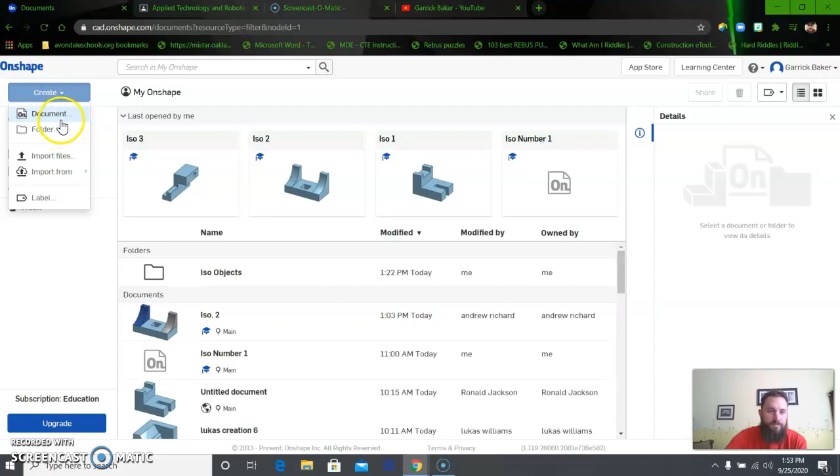I'll go to my Onshape, create document, and this is ISO 4.

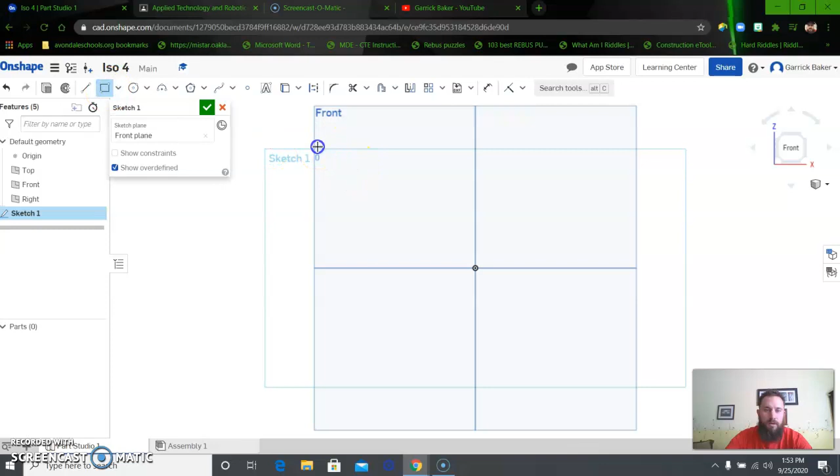I'm going to create a sketch on the front face here again. I'm going to do a rectangle, corner rectangle, and it's 4.5 wide. The height of it was 2.5.

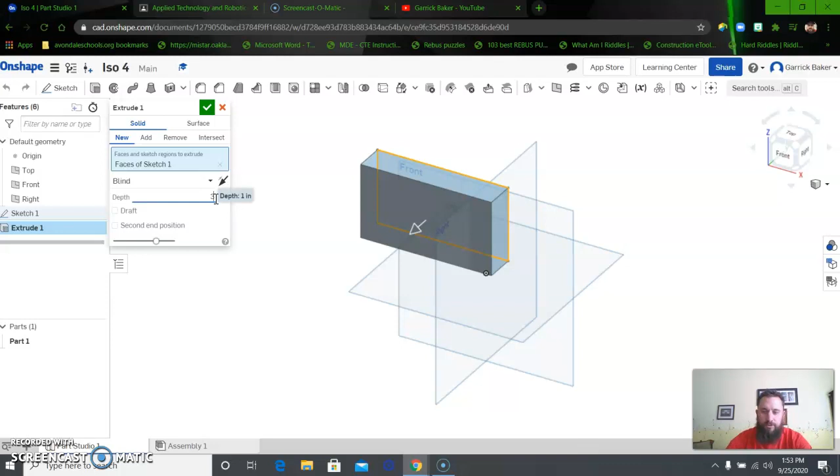When I go to extrude it, I want to extrude it 3 inches. Enter. So I got this basically without the arcs cut out.

First thing I'm going to do is this guy right here. Same kind of idea we did with number 3, I'm going to create a circle and cut it through. The circle has a radius of 1, and here would be the center point. So the radius is 1 inch, and it's directly in the middle of this square.

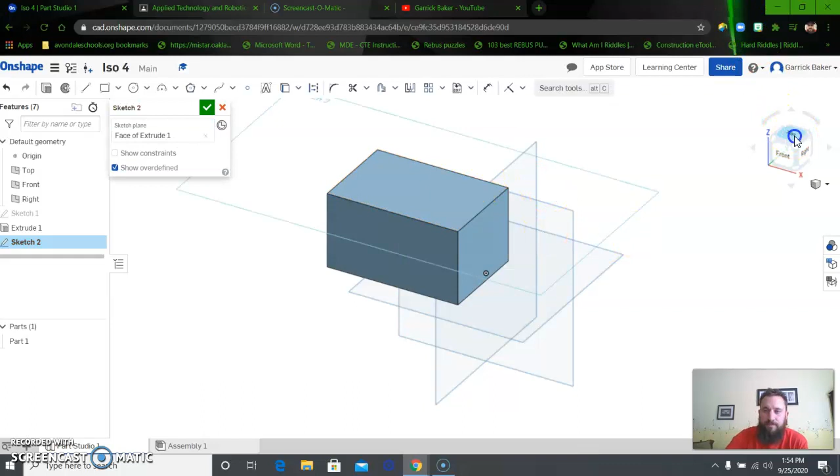I'm going to go back to my part and create a sketch on the top of this face. I'm going to create a circle using a center point circle, and I want my center point directly in the middle of this line. If I go up to this corner and move my cursor down, it should snap to the center of the line. You see that square? That is the center point.

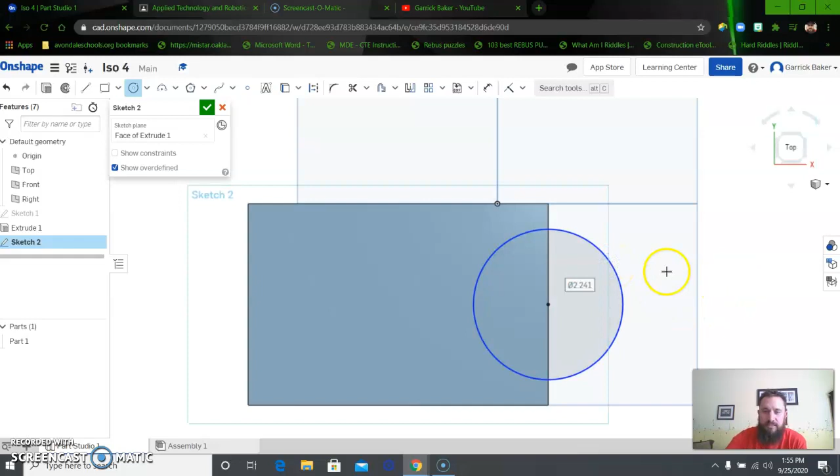I'm going to click to start my circle, then click to set it. The radius was 1, so the diameter is 2. Enter. After creating my circle, I'm going to go to extrude.

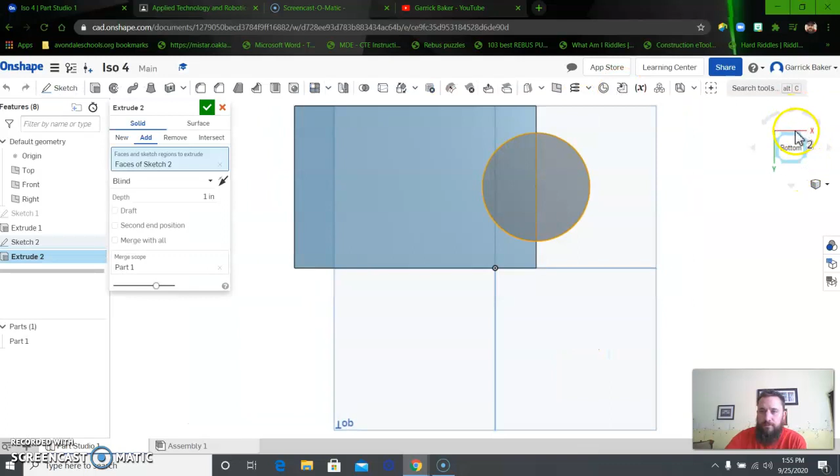Look at it from, not the bottom, right here. I'm going to click remove, and it's going to cut through this object. I'll change my blind here to through all. Click through all, then enter, and boom, there is my part cut out.

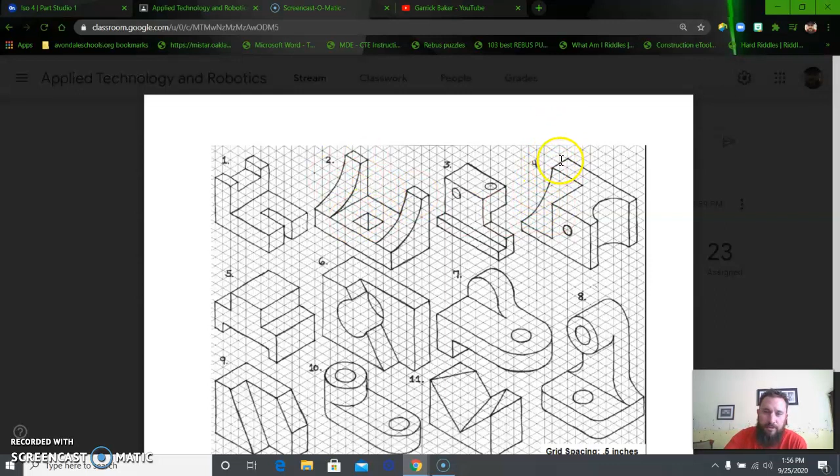Now I want to do the same on this other side here. I'm going to create a 3-point arc, just like we did on number 2. I know the start point is 1 inch over from here and 1 inch from here.

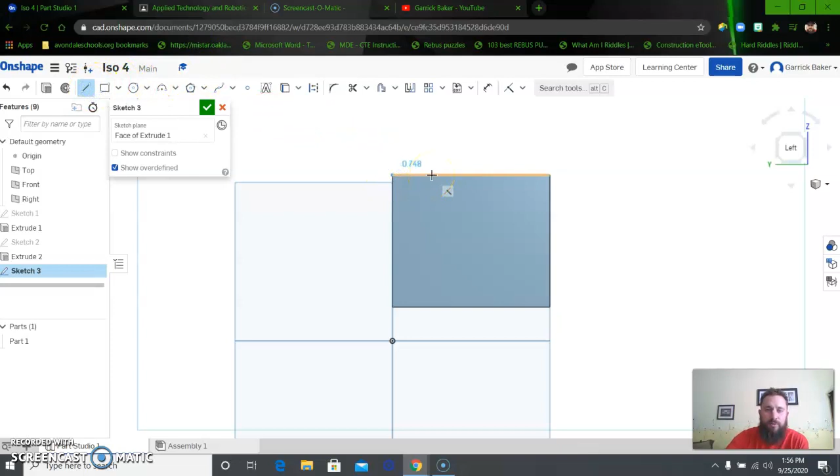I'm going to go to my part, look at my left side, and create my sketch right here. I'm going to make some reference points. I'll create a line starting at this corner, and that line is 1. Close out my line, then create one from the bottom corner up, and that is 0.5. These are basically just like reference points for me - I could have changed them to construction lines, but we'll get into that another time. These are just lines for reference.

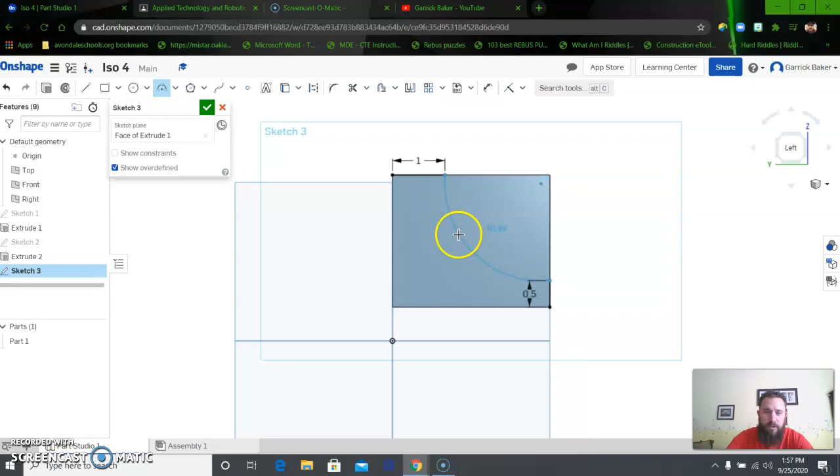Now I'm going to create a 3-point arc. My start point will be the end of that line, and the end point will be the end of this line. I want to make it come out this way. The radius of this is going to be 2. Click, let me click, no, then let me click.

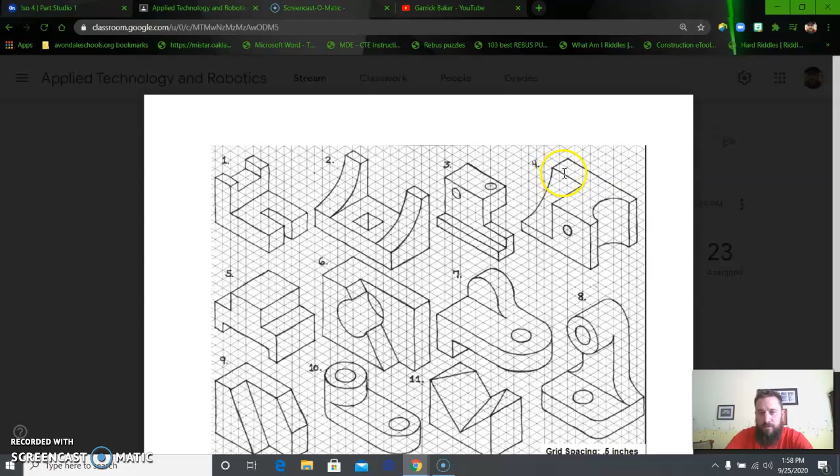All right, try that again. I'm going to dimension it - the radius again is 2. If we look back at our part here, now it cuts in, not all the way through, but it cuts in 2 inches.

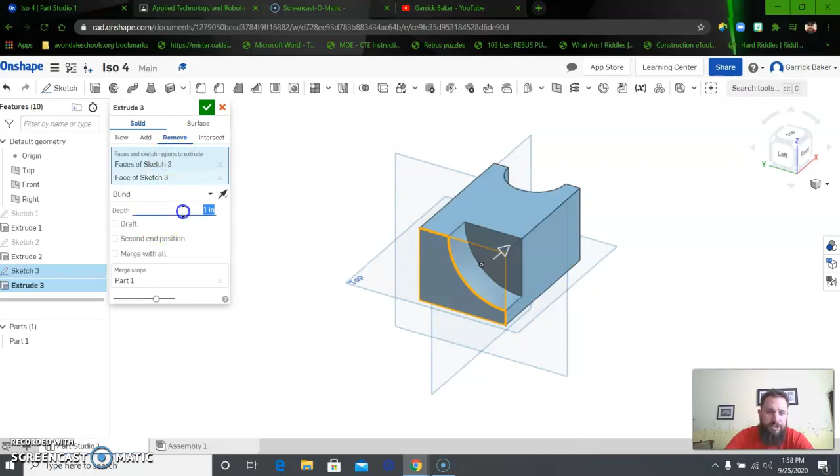I'm going to click extrude and select this spot right here. Now let me select just this part that I created, and I'm going to click remove, and change my depth to 2. Click enter. There we go. Check it, and now we got this part cut in, this part cut in.

So the only thing missing now is this circle, this hole. This hole also goes all the way through. Just like we did in number 3, we're going to create a 1/2 inch diameter hole that is up 1.5 inches and over 1.5 inches.

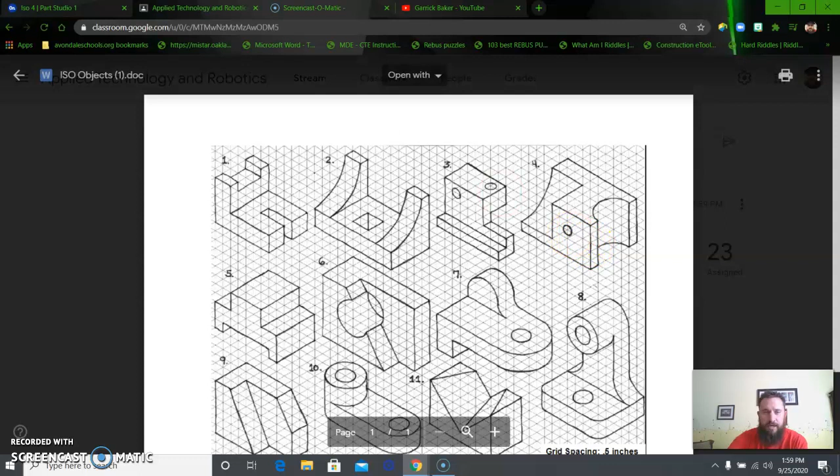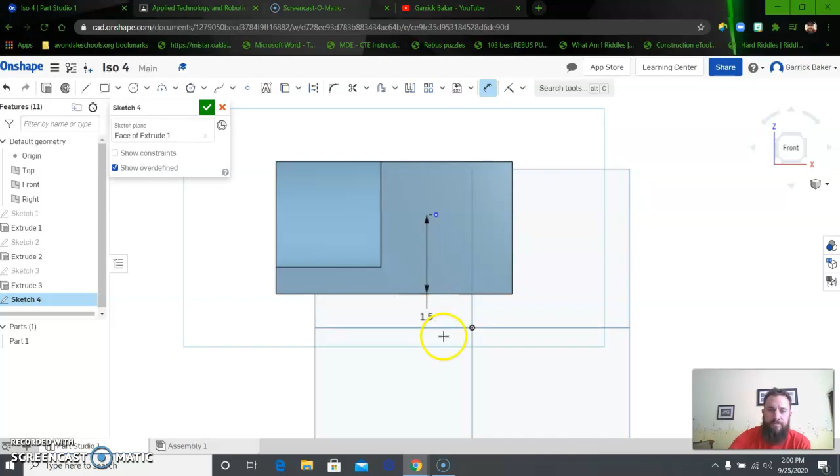I'm going to create a sketch on this face right here, looking at it from the front. I'm going to do something a little different - instead of making a circle, I'm going to start with a point. I'm going to create a point on this face. I just clicked it randomly, so I'm going to dimension it now. I know it is 1.5 inches from here and 1.5 inches from here.

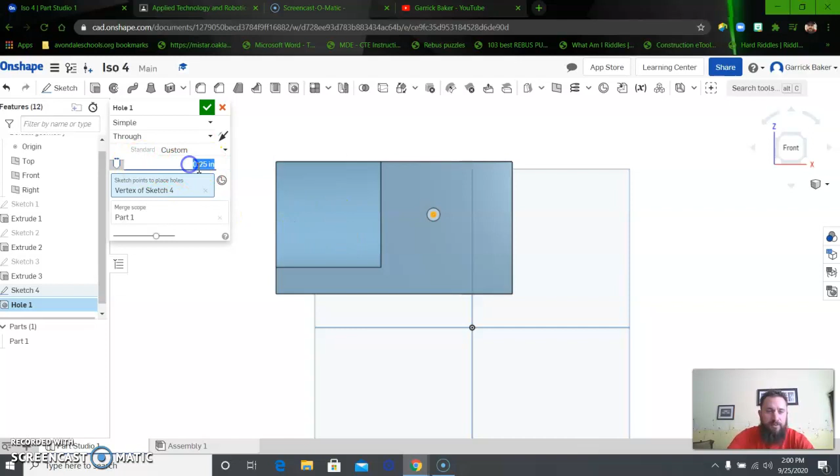Now with this point, I'm going to use the hole tool. Instead of hitting extrude, I'll go over to this tool right here, called hole. I'm going to click on hole, and select my point that I just made. Now it's starting to make a hole, and I need to change the measurement - the diameter I said was 0.5. Now it's a simple hole, and it's going to go all the way through.

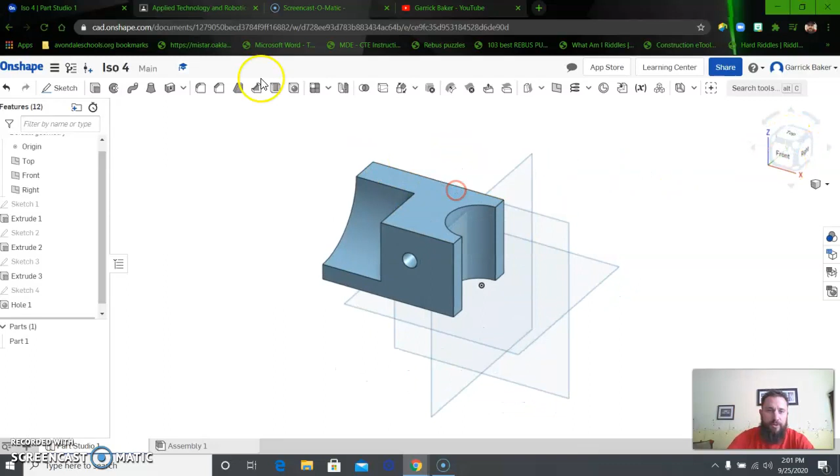If I look at it from here, it's going all the way through, and I am just going to click done. Just like we did with the circle, the hole works just the same way - it's just a different tool for you to use. All right, so that is number 4. That's what it should look like.